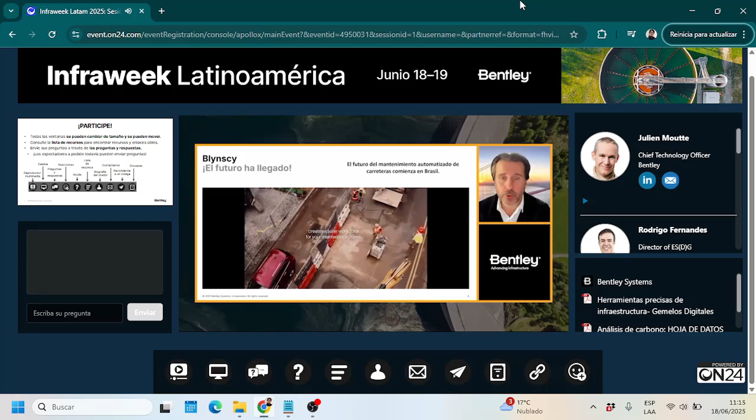¿Por qué es importante esto para América Latina? América Latina tiene una de las redes viales más grandes y menos monitoreadas del mundo. Las inspecciones tradicionales son manuales, costosas y a menudo retrasadas.

Con Blyncsy, los concesionarios pueden cumplir con todos sus objetivos regulatorios y los gobiernos municipales y estatales pueden clasificar las necesidades de mantenimiento con la puntuación de gravedad en tiempo real. Mediante el uso de flujos de trabajo con inteligencia artificial nativos en la nube, Blyncsy puede reducir el tiempo entre la detección de un problema y la intervención, lo que ayuda a mejorar la seguridad pública y la vida útil de nuestros activos y de nuestras carreteras en Latinoamérica.

En última instancia, nada de esto funciona a menos que colaboremos a través de equipos, herramientas y soluciones. Es por eso que nuestras soluciones digitales están diseñadas para conectarse con lo último disponible en el mercado latinoamericano, sin necesidad de reemplazar sus sistemas existentes. Solo tiene que conectarlos y utilizar a Bentley como puente entre sus soluciones y sus gemelos digitales.

América Latina tiene el talento, América Latina tiene la ambición y ahora tiene las herramientas. En Bentley creemos que el futuro pertenece a aquellos que adoptan la inteligencia de la infraestructura, la capacidad de sentir, pensar y actuar utilizando el contexto digital. Les invito a desafiar viejos flujos de trabajo, a explorar nuevas ideas e imaginar qué es lo que pueden convertirse sus proyectos cuando están conectados, sean inteligentes y sostenibles. Muchísimas gracias. Contamos con su ayuda y construyamos algo extraordinariamente juntos.

Bueno, supongo que ya imaginan lo que les voy a decir. La inteligencia artificial también nos puede ayudar aquí. Hacer un seguimiento regular de lo que está pasando en el terreno puede ser peligroso y muy tedioso.

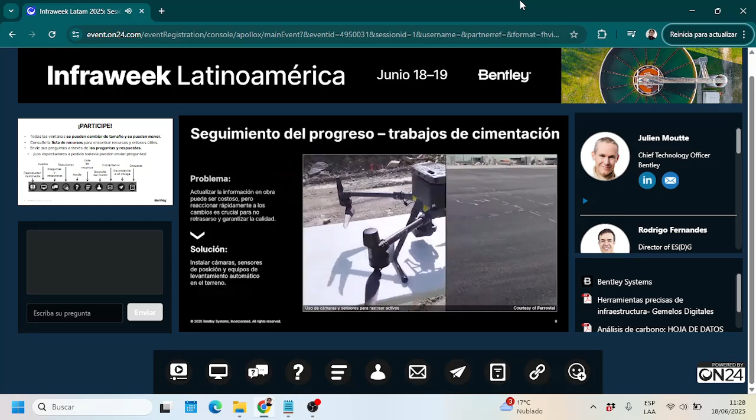Con la llegada de drones, podemos tener un ojo en todo lo que está pasando día a día, y para analizar estas fotos, flujos de vídeos y nubes de puntos, la inteligencia artificial nos puede ayudar a automatizar e identificar los detalles más importantes. Aquí tienen un ejemplo de un modelo neuronal, otra vez, que es capaz de analizar varias nubes de puntos y detectar los cambios entre ellas.

Cuando mapeamos estos cambios al modelo BIM, podemos seguir y reportar sobre el progreso de la construcción, pero también sobre posibles desviaciones y sus eventuales consecuencias.

Para poder acceder a este tipo de avances, es necesario captar el estado en el terreno. Vemos aquí un ejemplo de un cliente llamado Ferrovial, basado aquí en España, que están equipando sus grúas, su maquinaria, sus drones y hasta los cascos de seguridad del personal con cámaras y sensores.

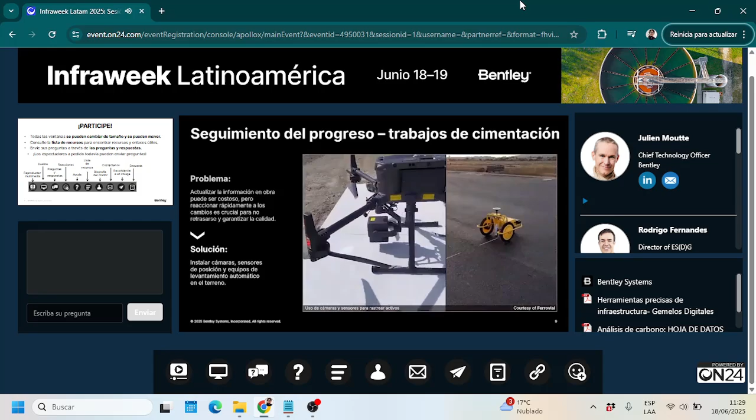Como les decía, nuestro sector se está transformando rápidamente. Para completar nuestro giro del sector, tenemos que mirar también cómo la inteligencia artificial puede ayudar a operar mejor las infraestructuras que soportan nuestra calidad de vida. Muchas de ellas son extensivas y monitorizarlas es un trabajo fastidioso.

¿Cómo detectar los problemas lo antes posible? O incluso cómo tener un buen entendimiento de la condición en la cual está la infraestructura y lo que tenemos ahí fuera y que tenemos que operar.

En este último ejemplo, pueden ver cómo el flujo de vídeo de cámaras integradas en coches que van circulando en la red día a día se puede analizar con la inteligencia artificial para detectar las señales, su eventual obstrucción por vegetación, defectos en el asfalto o objetos peligrosos.

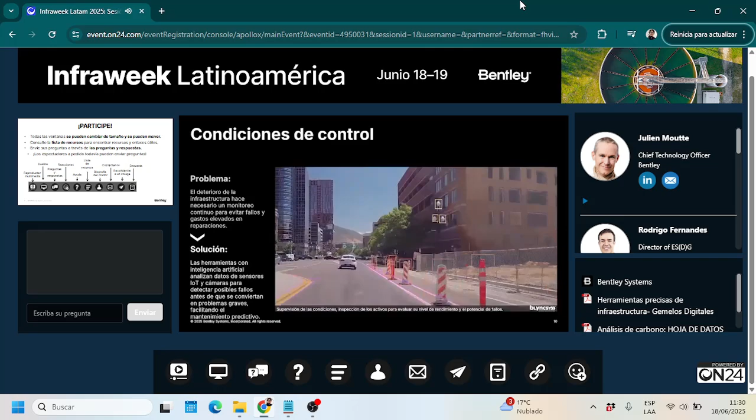Eso permite informar a los operarios en un tiempo óptimo de dónde y cómo actuar para mantener la infraestructura y el servicio que está dando en buenas condiciones.

Hace casi un año firmamos un acuerdo de colaboración estratégica con Google y más recientemente anunciamos que habíamos integrado los datos de Google Street View en nuestro producto llamado Blyncsy. Con esto podemos ampliar aún más la cobertura de datos y combinar nuestra experiencia de ingeniería para detectar incidentes y entender si son importantes.

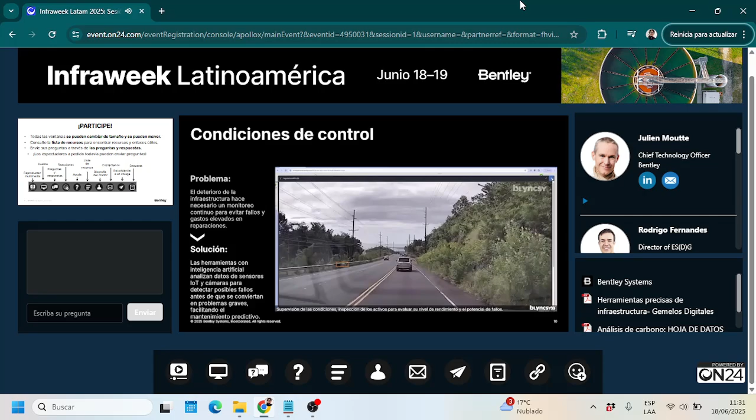Espero haber podido inspiraros sobre casos de uso poderosos de la inteligencia artificial en el mundo de la infraestructura, pero antes de acabar, me gustaría recordar aspectos importantes. Mucha de la infraestructura que usamos cada día se puede considerar como crítica. Los datos que describen dicha infraestructura son sensibles y hay que ser prudentes cuando empleamos tecnología como la inteligencia artificial con estos datos.

Primero, es importante entender cómo se van a usar los datos con estos modelos de inteligencia artificial cuando usamos un producto. El proveedor del producto tiene que dar garantías y transparencia sobre cómo va a usar vuestros datos, ya sea por riesgos de seguridad o solamente para proteger vuestra propiedad intelectual. Estos datos no pueden escaparse por un uso descuidado de la inteligencia artificial.

También es importante entender que la inteligencia artificial intenta detectar y reproducir patrones que ha observado. Cuando se usa para generar contenido, puede introducir un sesgo debido a sus datos de entreno. También puede generar cosas erróneas y alucinar. Por eso es importante poder validar lo que recomienda o genera con herramientas de simulaciones y validación que ayudarán a los ingenieros a verificar la calidad del trabajo final.

Espero que disfruten de la InfraWeek y que estos ejemplos de uso de la inteligencia artificial les inspiren para sus proyectos. Que tengan un gran día y gracias por su atención.

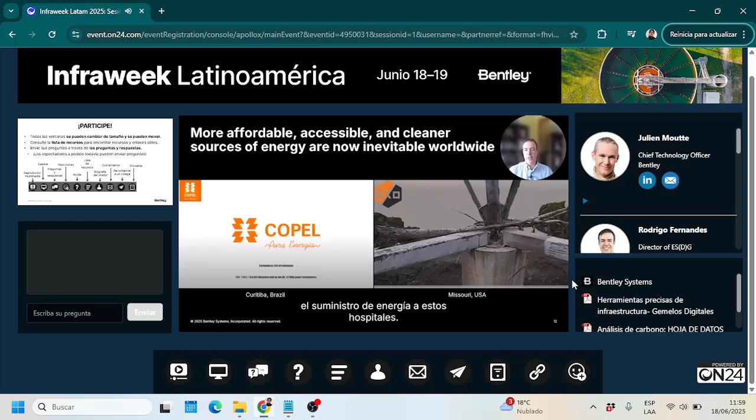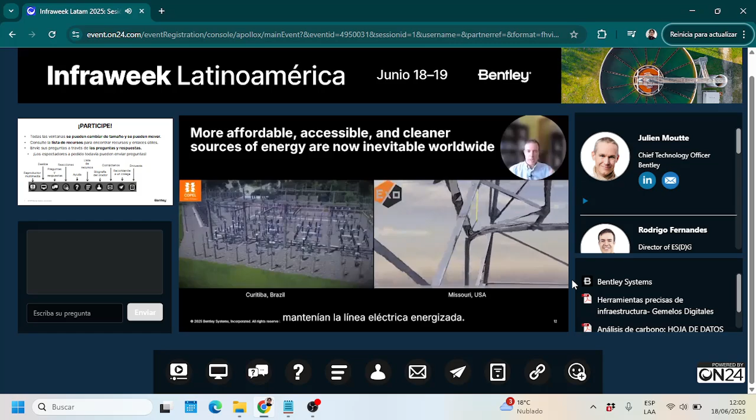We are talking about critical infrastructure here. But what this company did was use drone photogrammetry and digital twin technology, basically combining iTwin Capture and PLS-CADD to build a digital twin of the damaged tower. So they were able to assess structural problems and design emergency stabilization, all while keeping the power line energized. They were able to obtain a much faster response with this unconventional way of inspecting versus ground-based surveys that would take much longer.

In another angle, looking from a city perspective and from a mobility angle, these are two other success stories, two other examples using digital technologies for sustainability outcomes - it's part of their business.

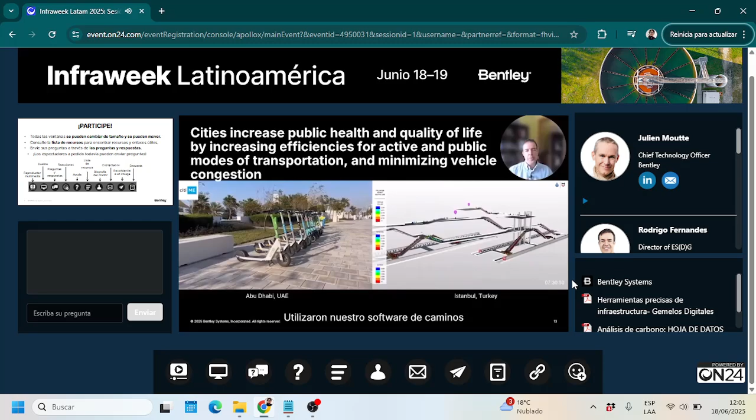What they are doing on the left, Abu Dhabi, they used our OpenRoads software to design and plan the development of cyclic lanes for cycling and walking for citizens. We're talking about micro mobility here, active modes of transportation, in a complex city like Abu Dhabi. This is improving quality of life of citizens there, and of course also improving air quality, because you have more cycling and fewer vehicles. It's what they are trying to do.

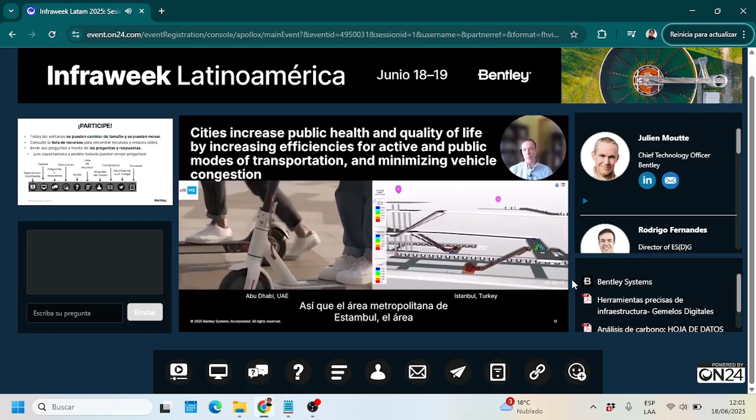On the right, a similar approach, but in this case not focusing on active modes of transportation, but more on public modes of transportation - Metro Istanbul. The population grew like 50% from 2020 to 2022. This increase has caused significant traffic problems, especially in the old part of the city, which is where they developed this metro station.

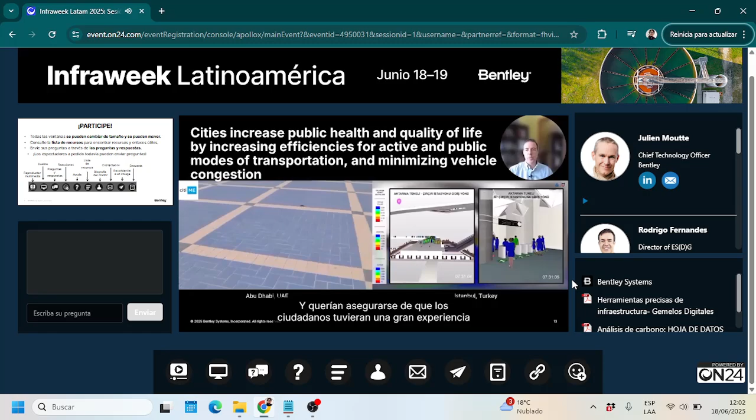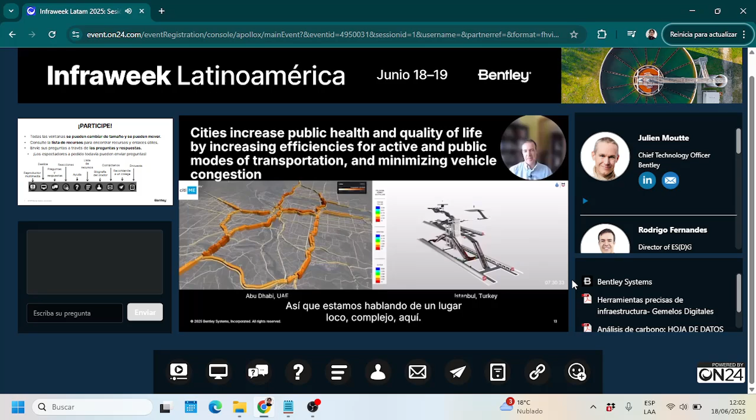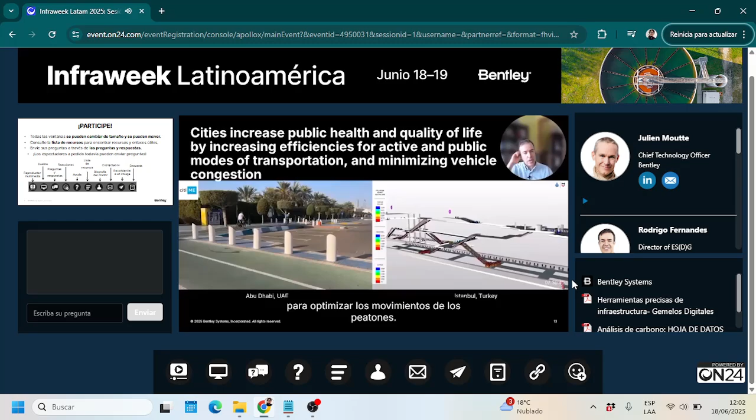And they wanted to ensure that citizens would have a great traveler experience, with citizens entering and leaving the metro station as fast as possible. Note that we are talking about some stations that serve 70,000 passengers per hour, so a crazy, complex place. They need to do as much as they can in terms of efficiency, so they used our software Legion to optimize pedestrian movements in the station.

So this is basically using 3D subsurface modeling as a way of understanding the problems and risks that can affect people there.

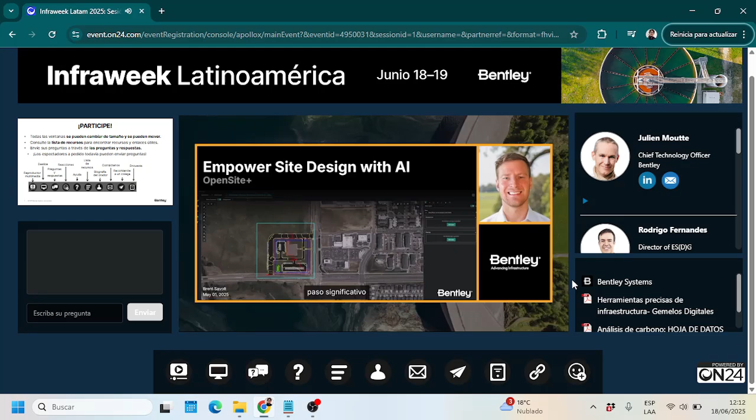Before we explore OpenSite Plus, let's highlight some key challenges in the AEC industry. Those challenges are technology, workforce, and industry shift. Many firms face time-consuming manual processes and struggle to find and retain skilled workers. I know this firsthand, as I worked 60-plus hours a week at my previous firm just three months ago. As the industry evolves with new compliance standards, the demand for digital delivery and high-quality work within budget grows.

What sets OpenSite apart from other generic civil applications is that it's designed specifically for site design. The shift to 3D workflows and AI is changing design approach for a competitive edge. The shift from old 2D sketches to advanced modeling shows that workers need innovative design analysis earlier in the process. As the industry changes, the demand for automated plan production is increasing.

The three main points we're going to hit on today for OpenSite Plus are: accelerate site planning and due diligence, incorporate grading optimization, and automated plan production.

OpenSite's key AI-powered features will help firms overcome the many site challenges we discussed: compiling agency requirements to adjust design with Copilot Civil Assistance, and estimating construction costs by optimizing site layout for balanced earthwork. Utilizing AI, automated annotating, labeling, and sheeting ensures instant updates and compliance with client standards.

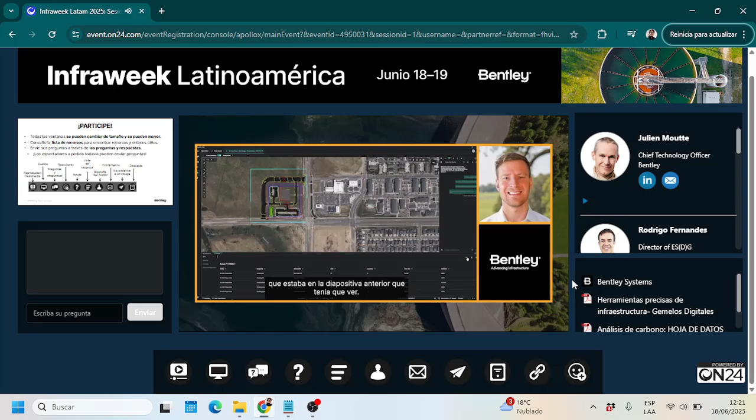Next, we're going to take a look at drawing productions. Creating construction drawings is one of the most time-consuming tasks in land development. Using AI drawing production, you can accelerate your internal process and streamline annotation for 10 times faster construction drawing production.

Next, we just need to select a category. We're going to do dimensions and tables, and we want to make sure we're using the site plan. So let's go ahead and create that. Again, this is done within seconds, not minutes. As opposed to if I was using AutoCAD, this would be taking me hours.

Just like that, we have our horizontal control plan. And typically on horizontal control planes, I don't like to see the contours. So again, you could easily modify that and change those. You could keep on freezing those items depending on your preference.

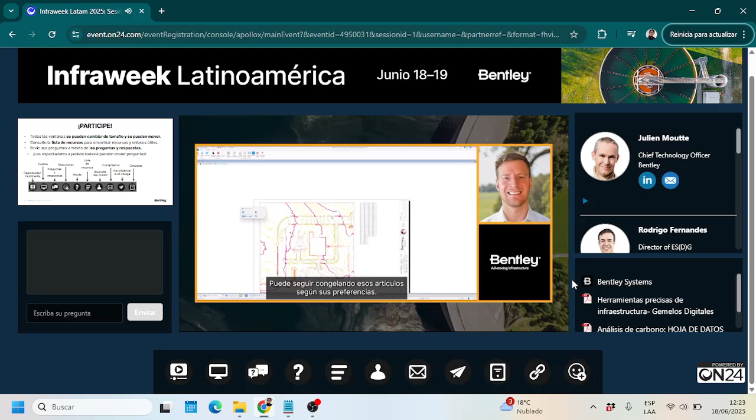Now let's go in and create a grading plan. So we're going to go back to our design model. We're going to use that same viewport, and we're going to create a grading plan. Make sure we have the correct sheet and our category. And there you go—there's your grading plan.

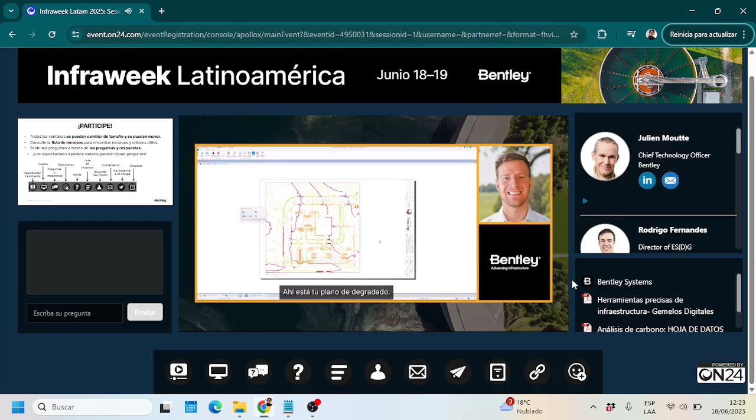So we're able to complete the project and enjoy dinner with friends and family instead of being stuck in another late night design ordeal with your design team trying to adhere to standards while pushing plan sheets out. How is all this possible? Because you accelerated site planning and due diligence with civil assistance, you incorporated more site grading costs into your design approach with grading optimization, and you sped up plan production using AI. Thank you for your time and have a good day.

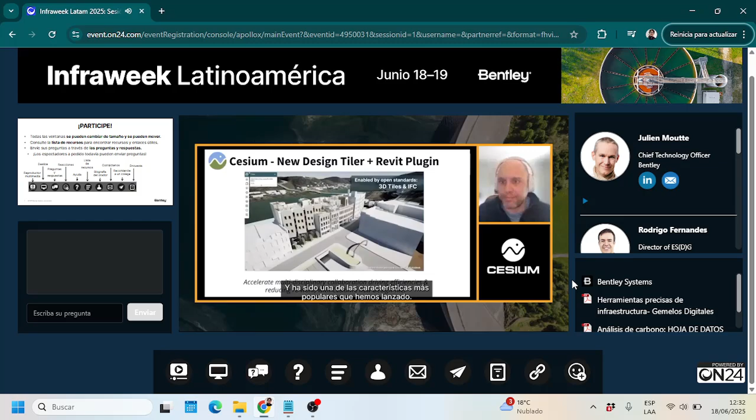And again, the plugin to Revit enables users to extract all of the rich textures and materials information from Autodesk into the Cesium visualization.

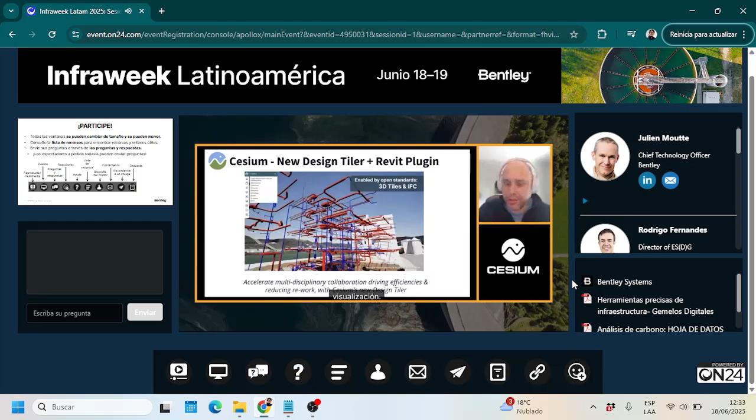Cesium is also used heavily in public outreach. Drip Visual built a product on top of the Cesium platform for the Netherlands, specifically to help with urban planning. So if there's a particular design, such as a highway overpass, a parking lot, a building, this particular application allows the stakeholders of the Netherlands to review the designs before construction begins, and then provide feedback through this particular product to the government or the AEC engineering firms, so they can essentially take into account that public outreach and the opinions before construction on the designs begins.

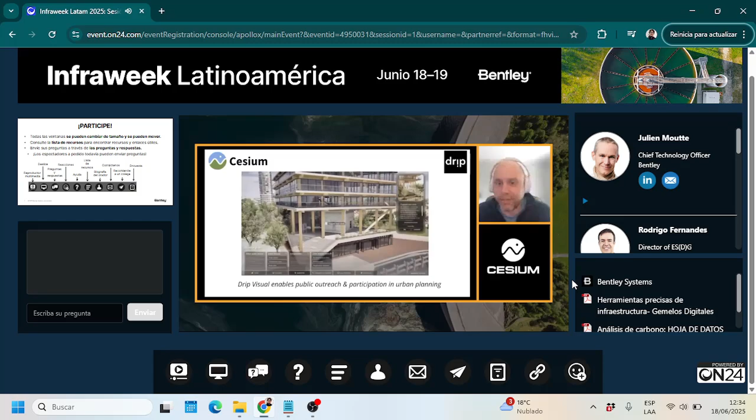So again, a fantastic public outreach platform.

One of our other users, EarthBrain, a subsidiary of Komatsu, leverages Cesium as part of its smart construction product and projects. EarthBrain provides the ability to visualize a construction site in 4D, allowing users to go back in time and see the Earthworks project 2 years ago, 1 year ago, 6 months ago, view the current project in real time, and simulate future changes in Earthworks. Incredibly valuable for EarthBrain and Komatsu users for smart construction use cases leveraging the Cesium platform.

Lockheed Martin built a product called the Joint Activity Manager. It takes satellite imagery and through AI identifies the hotspots of wildfires. They incorporate weather patterns and wind to identify where the hotspots are migrating and where wildfires are spreading, then use this information to coordinate with local fire departments to help mitigate the spread. A great use case taking multiple data sets, imagery, and weather, leveraging AI to identify insights into where wildfires are headed, and working with third parties like fire departments to help prevent the spread.